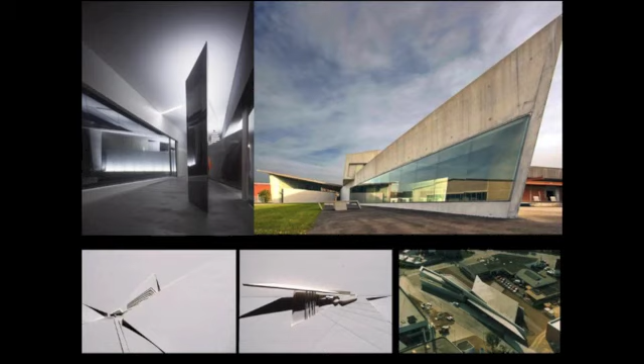25 years ago, we knew we wanted to do something very stylish. A year or two into doing all these drawings, a first client appeared, and I was working on this project, which took 3-4 years to complete. It was finished in the early 90s, and we developed these projects fully by hand with drawings and sketches, no computers involved. This year we celebrated 20 years since the completion of that project.

I'm still trying to look cool there. Then we created a series of projects, first in that harsh, geometric style, but unusual projects, like this housing project in Vienna.

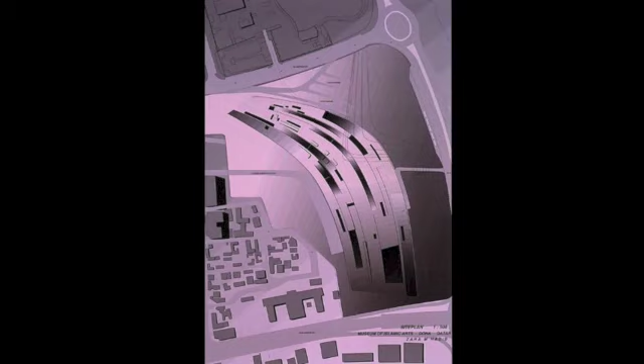In the mid-90s, after Vitra was finished, we got more into computers and into more fluid designs, curvilinearity, dynamism, and created a series of, I think, very beautiful competitions - maybe too radical for their time. This is the mid-90s, and all of these competitions were lost.

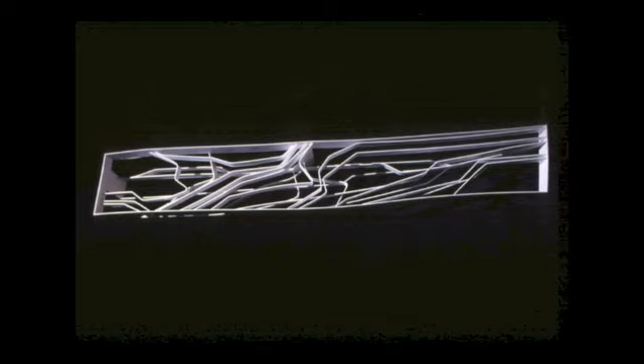So this is how you build success - you really have to spend 10 years losing competitions, I promise you, to develop a repertoire and keep going, losing and doing radical work. Maybe something comes out of it. Of course, there's no guarantee.

So these are all the lost competitions of the mid-90s. It became more fluid, more radical. And of course, we were still a very small, immature office.

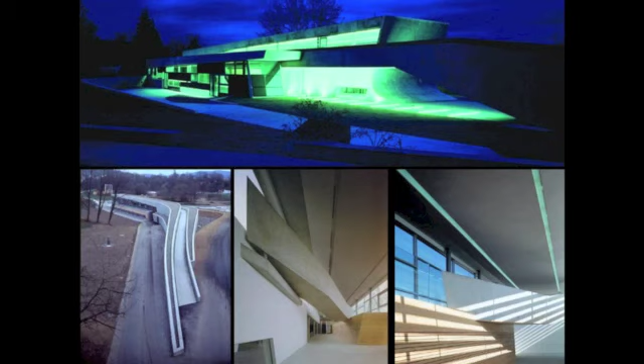Then we started to tone down a little and be more hard-nosed in trying to apply that approach. We had enough of losing - we wanted to win. So we got a series of projects in very short succession. By the end of the 90s, we won a lot of competitions, one after the other.

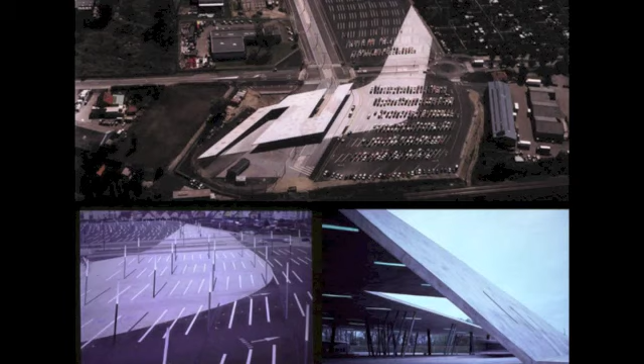All of these are competition wins: the Cincinnati Art Center, the ski jump, the Strasbourg Park and Ride scheme, which, by the way, won the Mies van der Rohe Prize. You can see here a very strong will to form, but it also takes care of the pragmatics of a car park, a train station, and a bus station.

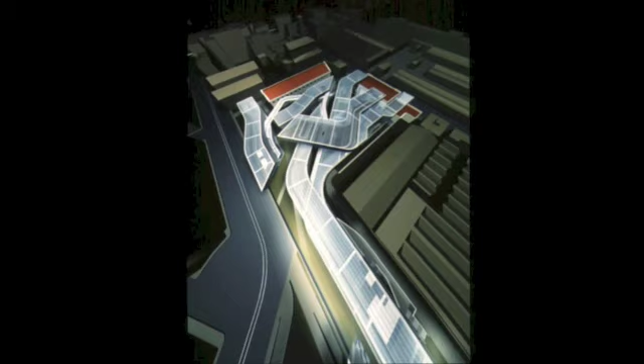And of course, we won our major competition at the time - this is in the late 90s, 10 years before the building was completed - MAXXI, the Rome Italian National Contemporary Art and Architecture Museum for the 21st century.

You can see here that we had already perfected 3D modeling using 3ds Max to develop these geometries and complex spaces. But at that time, we did not yet work with algorithms. Still, this project is fully within the paradigm of parametricism - this idea of adapting to context, of having a complex field which evolves.

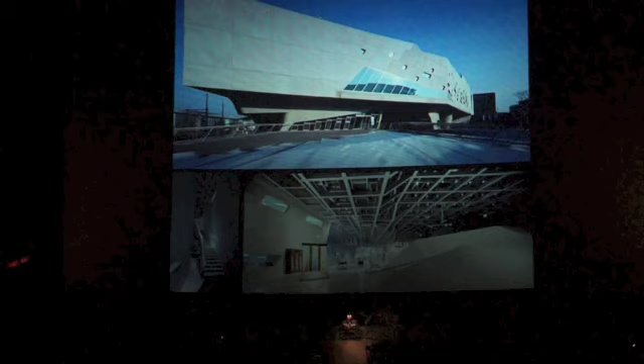A year later, we won the Wolfsburg Science Center. Now I'm clicking through a series of completed radical projects which established Zaha Hadid Architects. We moved from being a secret name known only in the student body and the realm of architecture, to a global brand through these projects, one by one, in the late 90s and early 2000s when they were completed.

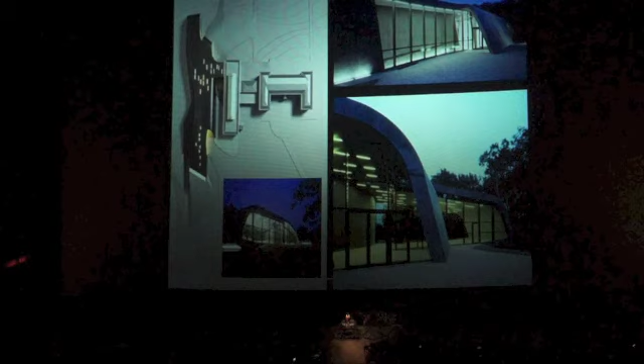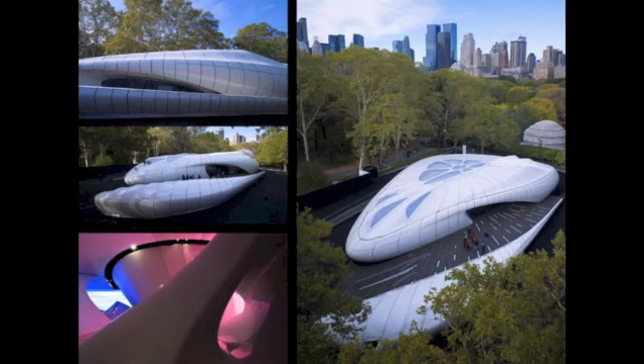In Germany, in Denmark, in Austria - you can see that although they become more fluid, they also become more refined and more elegant. Zaragoza in Spain, the Chanel Art Pavilion, which moved from Hong Kong to Tokyo to Central Park, New York, and Paris. And we made new friends in the process.

What's also important is that we always show exterior and interior, and the importance that the interior is very powerful, fluid, dynamic, and interacts with the exterior. So it's not only about exterior shape. And we also did pure interiors, like this one.

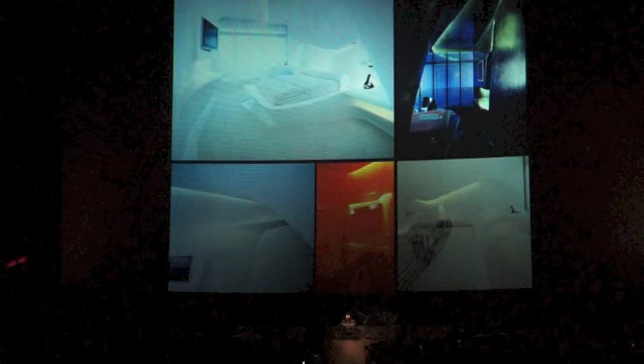Now the projects became larger, and again, all of these were acquired through competitions, like the Guangzhou Opera House, our first major project in China, which also took about 7 years to build. It becomes more radical, more fluid, more dynamic.

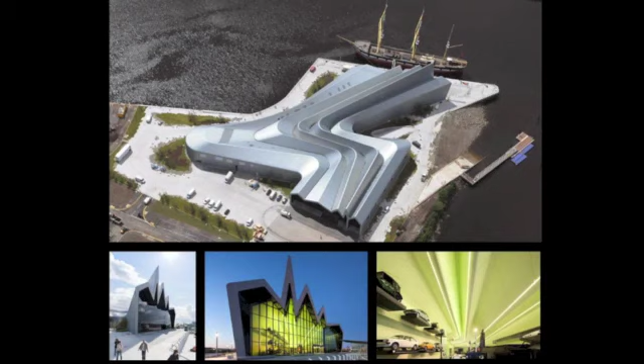We started to get into infrastructure and expand our repertoire. It's not only museums, opera houses, and cultural buildings - as you'll see later, we now have all the elements of the built environment within our reach: an interior recently completed in London, our first tower in Marseille, the Aquatic Center in London.

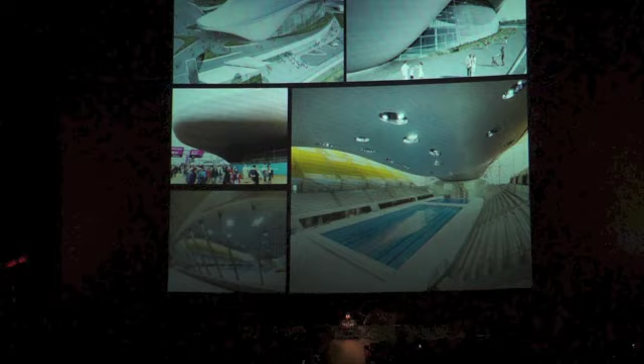And this one I'll spend more time on later - our currently biggest, perhaps most beautiful, and most evolved project, in Baku, Azerbaijan. It's a big cultural center including a museum, a national library, a conference hall, and a musical auditorium. So we got older, and we had new friends, and it's a different kind of audience we're trying to integrate with now.

But it took us 10 to 15 years to reach that, and now we have global clients and are operating globally. I recommend that you don't only work on big projects, but also do products, furniture, smaller things you can finish easily.

We've designed about 100 projects per year, but only very few get built. But these come out beautifully. They can be done on the side. They don't take 7 years, 5 years, maybe 3-4 months. We've always done that in the last few years, so there's a lot to show, to fill our spaces, and a lot to show off with.

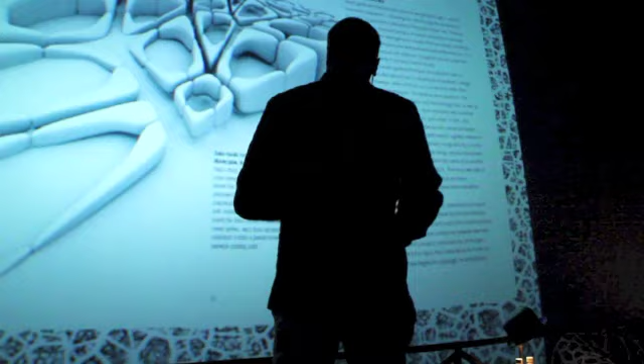I also want to say this: of course when it comes to executing the work now, I rely on you guys, on young architects, on skilled-up architects to help. My role now is instructing, talking, explaining, maybe doing little doodles. I used to do the modeling and scripting, but now I'm just doing that. And that's important—we moved from 4 to 400 people.

Okay, I wanted to walk you now through some of the theoretical principles which underlie this work, the built work you saw now, and then I will show you some new projects to illustrate that further.

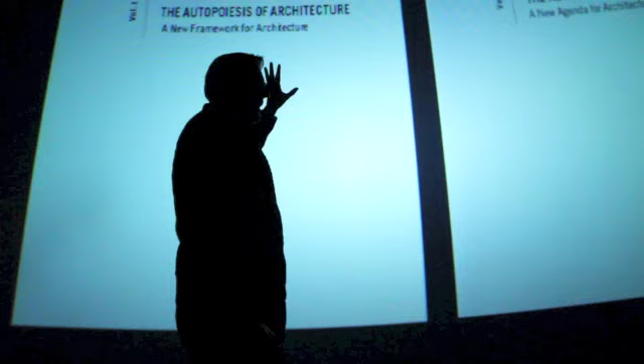I recommend this book. It's very big, but it took me 15 years to write, and I guess you will take about at least a year to read it. It's over 1,200 pages, maybe the longest theoretical book written on architecture so far.

Okay, what are we talking about? We're talking about parametricism, meaning that all the elements of architecture become parametrically variable. So we're not talking about rigid figures anymore, but everything is plastic, fluid, malleable, so that it can recognize and react to other forms. The forms are not hermetic and independent; they start to be set into relationship with each other and with the context. That's the meaning and power and beauty of making the elements and figures parametrically variable.

So we're moving from a world of these Platonic solids—the cube, the cylinder, the pyramid—which used to compose everything in classical architecture, but as well in modernism. It's always these discrete objects which are just added to each other. They never influence each other, and that's why they never notice each other and are sensitive to each other. So they just agglomerate, and if they agglomerate like today, with a lot of diversity, they generate a kind of urban garbage spill. There's a lack of identity—these things are piling in, they don't congregate into a legible local order.

Here we're talking about the objects being sensitive, interacting with dynamic fields with each other, with attractors, with force fields, and they generate very strong and powerful integral organic orders. And this work I'm showing here is already exactly 20 years old.

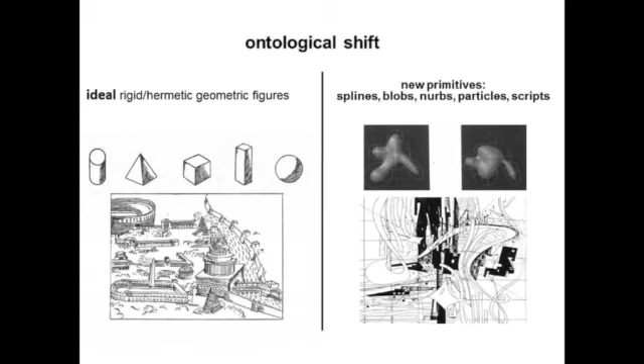When we were at Columbia University in '93, we started this process, the next stage, and also Greg Lynn with the blobs started that year at Columbia, maybe one year later. So it's very important that this took a while.

I'm showing these again from the animation to emphasize the difference. When you had these rigid figures, the cubes and cylinders, you drew them with a ruler and a circle, and they remained stiff and inert lines. The way we work with lines is we set them into motion, into arrays, into force fields, and let them configure and self-organize into complex variegated orders.

It becomes very hard to invent and imagine without these kinds of tools.

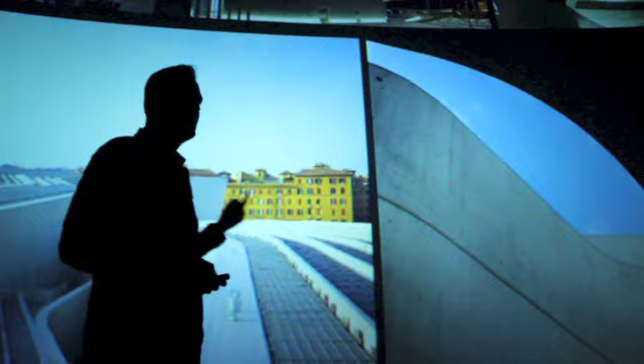To some extent you can interpret Rome as an early version of these kinds of lines—bundles of lines which flow and bifurcate and intersect and create an exterior complexity and an interior complexity. You also see that the whole building is brought under this radical formalism of these flow lines, and every pragmatic element is taken up and brought into this artistic process. That gives you a chance to create a very legible and navigable order.

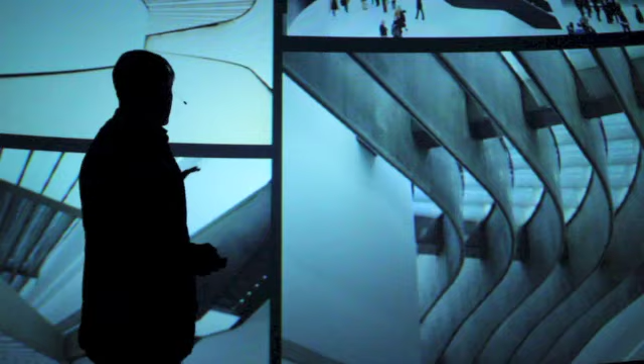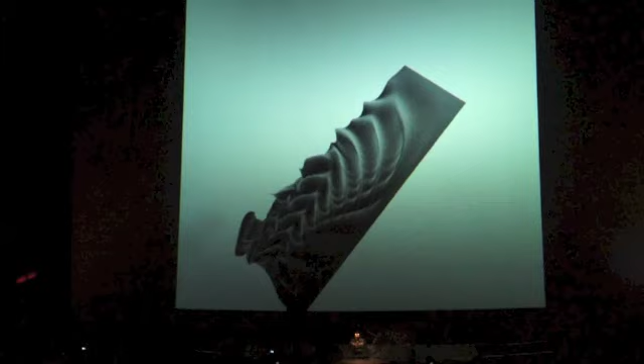So this is with lines. We have lines, planes, volumes. In terms of planes, when we work with surfaces now, we're not talking about flat and uninflected plates like floors and stiff mute walls, but surfaces which are radiating, which are rippling, reacting to impositions and becoming interactive with the environment, differentiating within themselves.

And this is the kind of environment we create with these kinds of surfaces, where the surface ripples to create a shelf, to create a bench, which then peels itself free.

So it's a continuous variation of forms and situations rather than just the assembly of preconceived discrete elements. This is a very powerful way of working.

In terms of volumes, we have these kinds of volumes which bleed into each other, which congregate and create larger unities in a dynamic field.

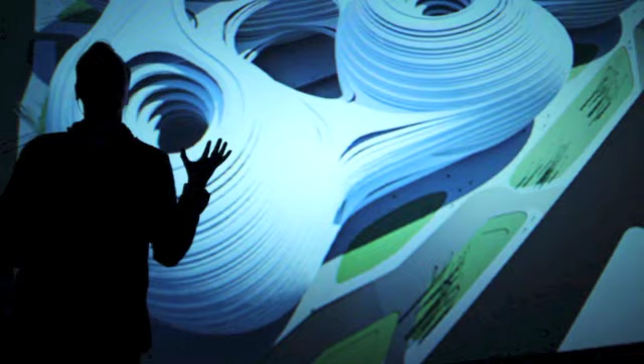And these are the kinds of projects which are coming out of that, which is all about making connections and creating a continuously differentiated and varying space, where with each move the scenery changes, but it changes in a lawful way, in a way you can orient and navigate it.

This, I think, is very powerful when we're talking about whole swarms of elements, whole groups. They're not kind of repeated, but they're differentiated.

So this means that the urban texture can affiliate to an existing context and bring that context into a larger order, at the same time generate very strong differences internally. Modernism would only be able to put something repetitive in the middle, so you'd have three different zones, and now we have one coherent differentiated whole.

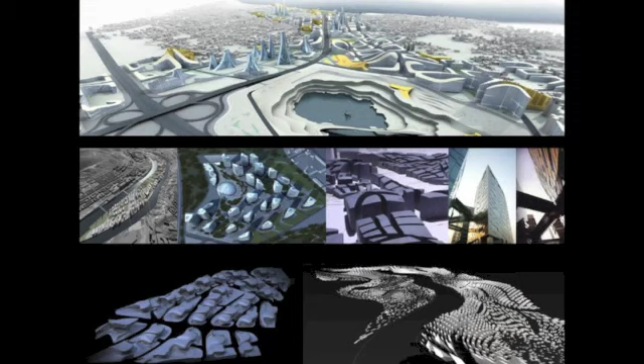And this is what then comes out of that, when we look further and apply these methods to master plans in Istanbul, in Singapore, in Bilbao, in Libya, in Spain, and London. And you can see when we look at the work in different schools by different students, it is in one spirit, and they all share the sensibility.

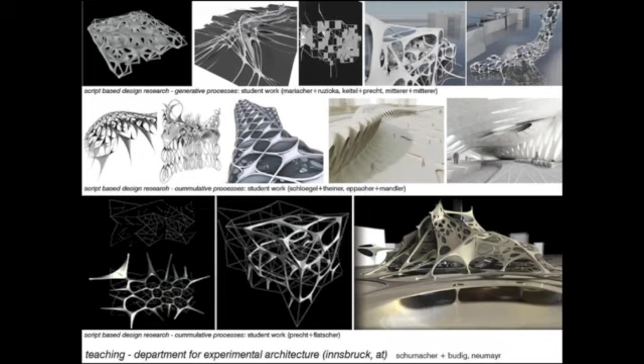They all look like organic structures, quite differentiated, fluid. But if you look close, they're very different from each other. So the internal diversity is much richer than the diversity you find in modernism or in classical architecture, although they all share a set of new physiognomy.

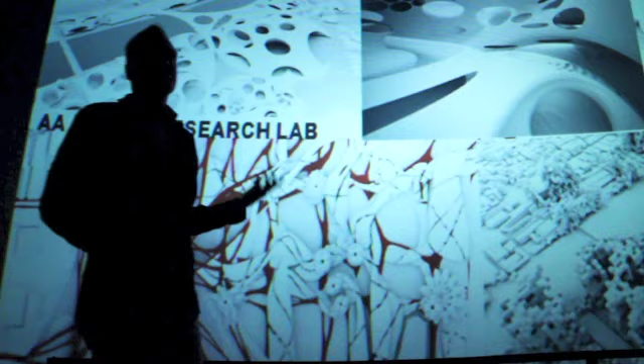So you have that dialectic of a unity of approach with a radical uniqueness in each of its instantiations.

This is the students at the AA. So there's various teaching arenas: we do the research at the university level to develop radical ideas, try them out across different studios, and then start to apply them at a later stage, or in parallel, sometimes with the students coming into the office in professional projects, to demonstrate also to clients, politicians, and mayors that what looks so strange has actually a deeper rationality and brings advantages to the cities which employ that.

So now I'm going to go through some of the principles which underlie this work, and initially they are just formal principles. What are we talking about?

Negative principles, meaning these aren't only ways of working at the moment, but we also have to reject old ways of working. We have to say we are not falling back into the old ways. So there's also a series of impositions: don't do this. So we're no longer doing rigid forms.

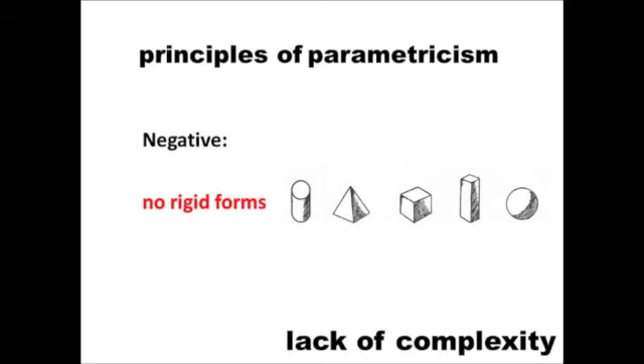These kinds of elements are excluded from our repertoire because they lack complexity and they lack interaction capacity. So we get rid of that. That's very important, and it's not only that I say you have to get rid of it — it's an observation that for over 10 years we have no longer used these elements. This whole new generation of architects, the whole office, all the students we're working with, have never used these. So it's also just a description.

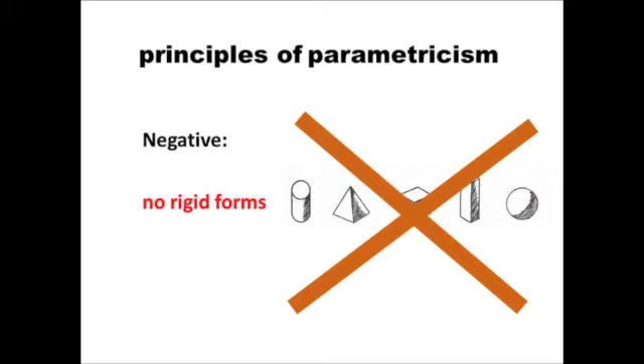We no longer do that, but I also say that's good. The next principle concerns simple repetition, which is also the default condition in modernism but also in classical architecture — usually you have the bays repeated, even in the Gothic. So we're saying there's a lack of variety; this doesn't represent contemporary society anymore. So we're also saying that is no longer possible.

No simple repetition. And there's another negative principle — I call it the principle of pure difference, which means you just let different elements come together, unrelated, and stay unrelated. That's what I call the garbage spill development. That's actually since the crisis of modernism, since the death of modernism — that's what happened globally.

There's not much master planning, not much coherent planning — it's just let everybody place whatever they would like, and that creates a kind of visual chaos, a cacophony of elements which is disorienting, and in the end, that's a tragedy, it looks everywhere the same. If you pick up garbage cans from every household, each one has very different things in them, but they all in the end become one spill, one undifferentiated, unrecognizable mass. So this makes it impossible to generate identity, I would argue.

There's simply a lack of order, lack of identity, and that's why we also need to reject that. The problem is we're rejecting everything classical architecture was doing in terms of rigid forms, repetition, symmetry. We reject everything modernism is doing, and we also reject everything that's happened since then in the real world. So we need to start all over again.

And the question is, what are we doing? You know what it looks like. What are the principles by which we are working? What is our source of inspiration, since all prior architecture is in a sense bankrupt and we have to start from scratch again.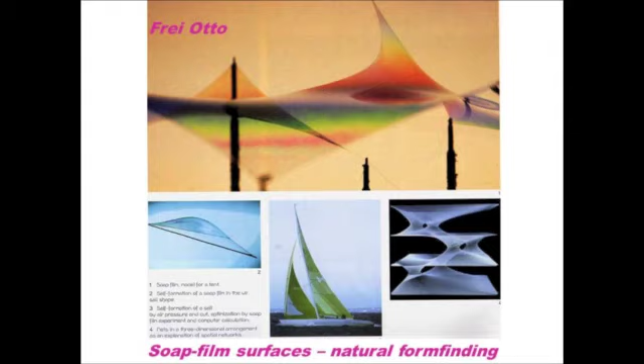And there's one precursor who has been doing some of that through going to nature and using physical processes to generate form. That's the great German engineer-architect Frei Otto, who started this work even in the 60s, 70s, 80s. In the end, he even got some computational support, but he was limited, of course, in his fabulous work to what he could study with physical models.

And we're going beyond that now, creating a second nature which is no longer limited by the physical models and by real physical processes, but we can simulate artificial processes and generate parameters outside of the natural ranges.

I'm just showing you now a few images, and I'm going to go quickly, of the way we work at the AADRL in terms of starting with physical models and physical form finding, and then moving from there into digital processes in which we explore the world further.

But you can see the richness of forms. This is like the endless forms of nature, produced by students exploring materials—exploring the elasticity of materials, exploring gravity, viscosity, tension, material texture—and generating materials by knitting geometries into material textures, with the idea of continuous differentiation.

This is a great laboratory for developing these forms and processes and inventing this kind of second nature. We're usually working from the physical into the digital and then back into the physical, and there's no end to what you could choose and work with. Of course, then there are issues of scaling, but it's all about finding principles of material computation, which could then be translated into digital computation and simulation.

So this is the world of quasi-nature. This is the kind of architecture which comes out of the office. And again, I'll show you these digital results.

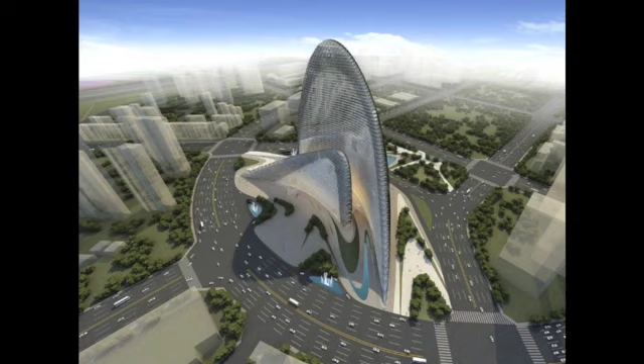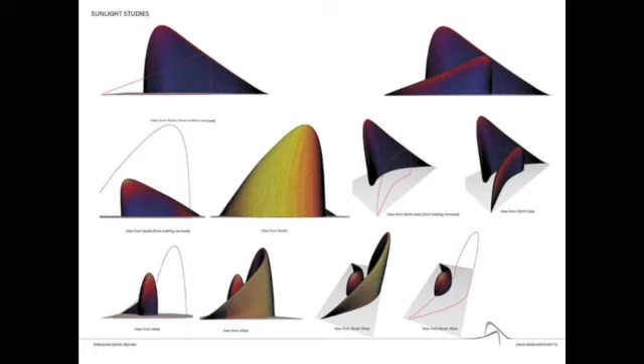And this is another example, a large tower we're just completing in Beijing, where we can integrate engineering information and data. So these are sun exposure maps which are applied to the volume. That information can then be transcoded through—that's your creative act of the designer—to invent some kind of transformation algorithm and a geometry which can receive that difference.

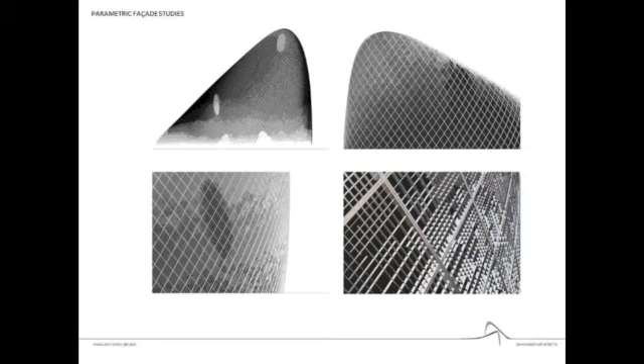And then you write an automatic translation from the sun exposure map into a differentiated geometry, which you can invent various ways of doing, of course. But this one is again an intelligent differentiation of a system or subsystem with an intelligent performative input.

And I think it's important here also to distinguish parametricism as a style which comes with a particular desire for differentiation from the mere application of the tool, which, for instance, somebody like Norman Foster, a kind of modernist still, I would argue, is using. He has to use a parametric system here because each joint is actually its own unique angle, and he invented a kind of generative component we can adapt to different geometric conditions.

But his intention is to use parametrics to deliver a kind of neutralization of the differences. He wants this to be looking as even as possible, even though it is locally very, very different. Our spirit is very different—that's why it's not only technique, but a kind of artistic desire, a style, a set of values.

We like the conspicuous amplification of difference. We like this kind of space. And I think this space, where you have differences, represents much better the way contemporary society operates. We are not just one big mass in one space, but differentiated in different lifestyles, different groups, different ages, different professions, different patterns of interaction, and they can find themselves in such a differentiated space, where the differences become very clear—singularly ribbed, grid ribbed, more densely coded.

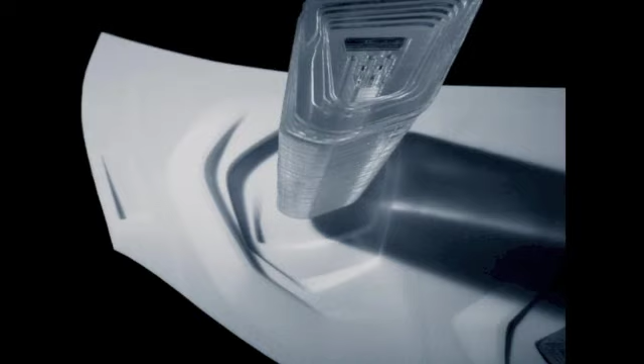Or here, where the tower interacts with the ground condition, it's not just sitting there flat without anything happening. When the tower enters the ground, it creates a crater. Every action has a reaction.

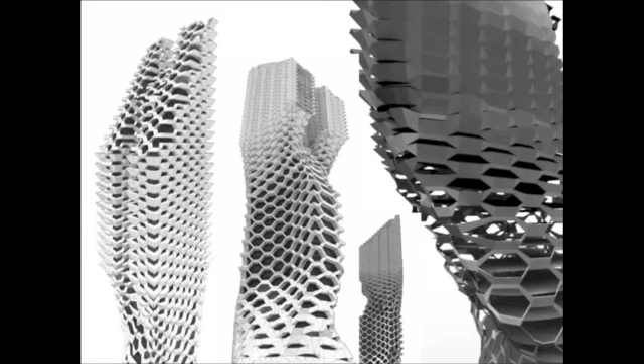And here again, there's differentiation in the tower section. So there's a square section becoming a T section, becoming an H section. And when we apply the facade, there's a correlation, a transfiguration or transformation, again from the facade, from something closed to more of an office curtain wall, to more of a kind of balcony system, all based on the hexagonal. So there's a kind of two subsystems, differentiated and correlated in a coherent way.

And I think you can also enact that with associative logics, in parametric models like this, where a lot of these geometries are pre-linked together and react to each other, follow each other, and work together.

So it's important that we always have multiple subsystems which come together. And here's another example from a student project. Some of these projects are quite old; these principles have been the same for 10, 15 years. So I can pick examples from 10 years ago or from last year. Maybe the last year ones are more refined.

But you can see here the skeleton initially, one thing is certain: it should be differentiated from the ground moving up, because forces and structural forces are much heavier on the ground, the loads, the moments, and there must be differentiation up the axis.

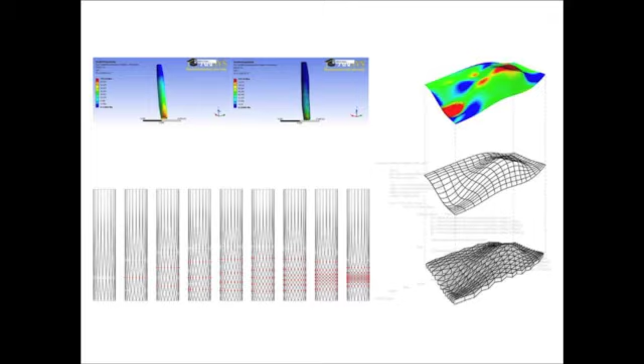Now if the tower starts to react to another tower and is bending, complicated, at the top you can see we're using finite element analysis, stress analysis, and then what we're doing?

We then use this information to make a more subtle differentiation of the skeleton. So we're generating an algorithm which translates the stress diagram of the volume envelope into a point diagram and then a structural network diagram. So that develops a skeleton.

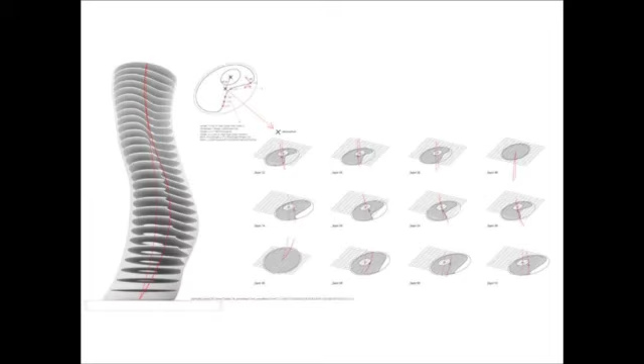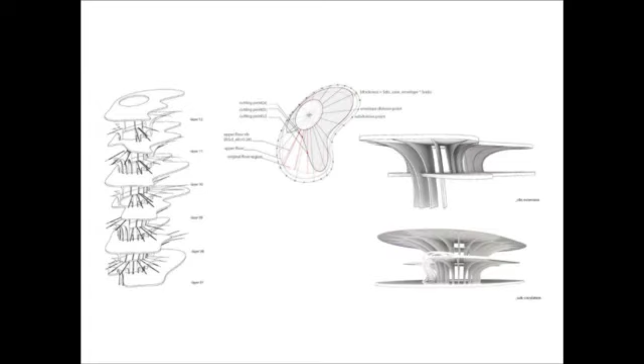Then we develop the idea of openings, the idea of the floor plates reacting and pulling away from the openings, the idea of ribs which react, configuration of the recesses, and the interaction of the core with the outer envelope. And this will be building up these subsystems, and you can see what happens.

There emerges a kind of natural beauty because there's differentiation and correlation, like in nature, where, for instance, the vegetation grows onto a topography and does it in a coherent way, in a differentiated way. Later we can perceive that as elegant and beautiful and well ordered, and we can also navigate this because we can read, for instance, the topography through the vegetation. We can find the river in the forest because it follows the topography, etc. So there's a kind of well-orderedness which makes the built environment more beautiful and more legible, more navigable.

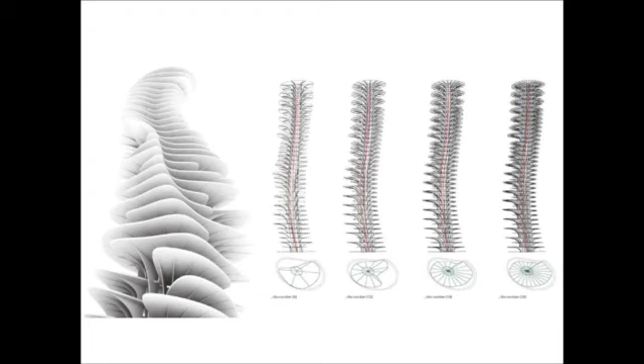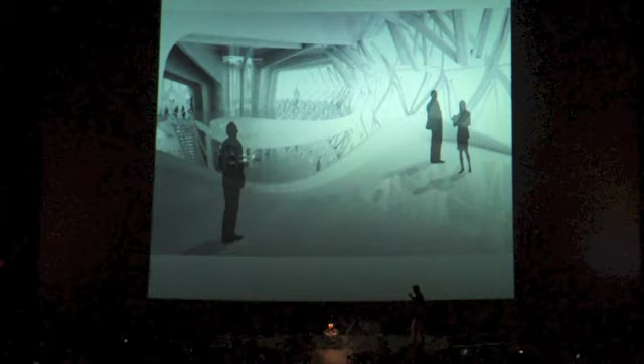And here the next layer comes in, the facade, which recognizes, again, voids pulling away. And so you get an orchestration of the different subsystems. I think we recognize this as a very powerful beauty, that complex organization.

So this, in summary: we have three negative principles—no rigid forms, no simple repetition, and no collage of isolated, unrelated elements. And three positive demands and principles, which in a sense are the inverse: all forms are soft, all systems differentiate, and all systems are correlated.

And what is very important is that this brings that intensification of relation. But also, I think what I wanted to say here is you can use these principles to critique your project and have a good heuristic to always improve your project, enhance your project, enhance its intensity and beauty.

So usually there might still be elements in your project which are too rigid—they're not really inflected, not informed. You have still forms of simple repetition in your project. So you can think: how can I differentiate further? How can I give my elements more degrees of freedom? And in particular, what you can always improve is that you can always correlate more. You can always let everything communicate with everything else.

It's an infinite project. So if you've allowed your skeleton to correlate to the envelope and to the interior, maybe you haven't yet correlated with some exterior context. Maybe there's a further element of context, maybe something in the underground, maybe there's a road coming in which your project should react to. So it is always—you can always do more.

With these principles, you can always enhance the intensity and beauty of your project. Of course, it's difficult - the more elements you already have interacting, the more any new element needs to pick up all these relations without destroying them. But what's good about this, I call it a heuristic - these are principles for how to improve your project. The more you work, the more powerful and beautiful your project will be. And this applies to urbanism as well.

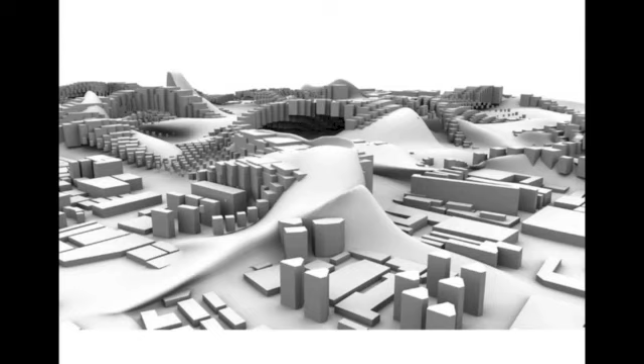This one is more interesting. It uses three fluids which interact and generate beautiful dynamic patterns. Then there's this transcoding - you take that information from the fluids and transcode it into voxels, all fluids in one way, or one fluid as a voxel, the other as a continuous surface. There's a lot of freedom. The same fluids generate different architectures, multi-systems. You can rerun the fluid or switch transcoding, and in the end all these different morphologies - three or four of them - each follow one of the data sets of the fluid, generating that complex variegated order we recognize.

Or another one where you have swarms of elements, and there's a correlation of the elements with the networking script. In the end, we generate something like this - very rich, intricate, generating a unique identity, never boring, always different, but also ordered and navigable. It's not that visual chaos, that urban garbage spill we talked about earlier.

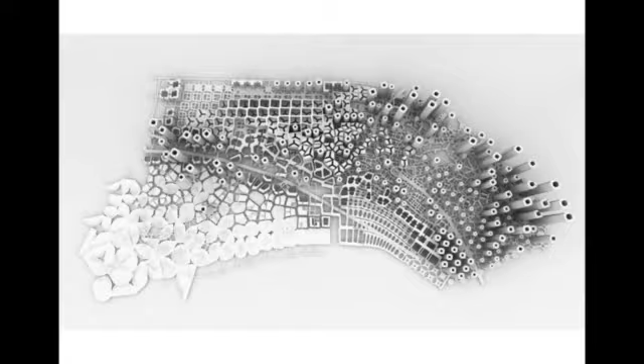This is one of our projects, the Istanbul Master Plan, and you can see we're creating something radically new that also embeds into an existing context. For the street system, we went back to some of Frei Otto's experiments with bundling and clustering lines through viscosity of water. We did this with the Maya Hair dynamic engine, and we wanted to pick up all the little streets from the context, but the new territories couldn't be that fine-grained.

So we started to bundle these streets according to a logic, and then did major line cutting north-south. We generated and abstracted this into a series, into a soft grid with some of these bundlings, and then filled in a new kind of fabric. We worked with two types, a block type and a tower type, the cross tower type, and then allowed these two types to become similar to each other.

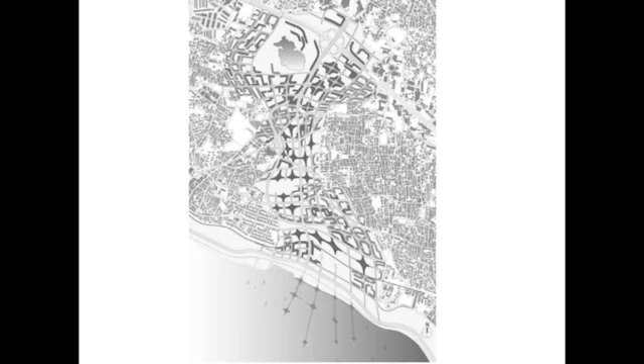So we're starting with difference and then assimilating them to each other - the cross tower and the block create a kind of quasi-tower. This way we generate a kind of lively texture. You can also see there's a correlation between the overall shape of the new territory - where it becomes narrow in the middle, it pushes the towers up. So the elevational profile gives information about how the plan expands.

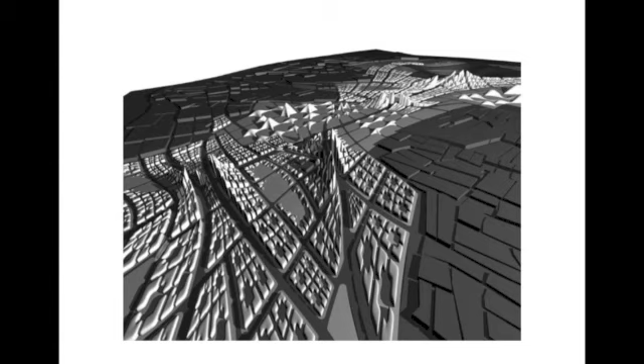This is very important, that these kinds of transformations give information, making the project legible and navigable, so that you can draw inferences from what you see to what you don't yet see. And that makes for good orientation.

You can also see here that when we zoom into the block in detail, the facade relief on the outside street is very deep, while in the inside courtyard it's very shallow, transitioning from public space to more private space. You can follow a kind of facade relief - a semiology which explains where you are in the system and which way you're moving, into the interior of a private domain.

So those were the principles, some of its important illustrations. Now I want to click through how this applies to design, for instance.

We just opened the design gallery in our London office, giving ourselves a public face, a two-story public showroom - let me show you what we have on show. We're creating these complex environments, three-dimensionally complex furniture pieces, sofas. They're always freestanding, interactive, creating fields. Sometimes they're quite abstract still, because these are experimental furnitures - they hover somewhere between sculpture and furniture, because when you're trying to develop new forms and new functions together, you might sometimes have to phase it.

You work on the new form first and then think of a new function later. You're also exploring ways of making forms, like this freestanding desk and tables. Just click through some of these images from our gallery.

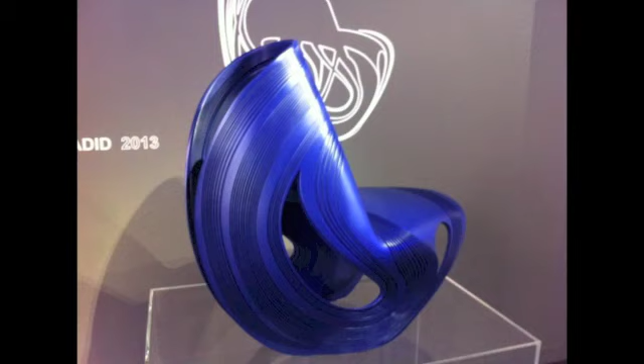For instance, this year at the Milan Salone del Mobile, the big international furniture fair, we launched 12 new projects. We like to be present at these events, so we created our own space, filling it with this new set of sofas, and launched a new auditorium seat.

Sometimes we like a whole range of furniture pieces to come together to create a space, rather than acting one by one. There's a lounging area, a shelving area, a freestanding piece, coming together to generate a total environment - a collection of elements that belongs together: a swarm of stools, an armchair, a cabinet, a chaise longue, shelving elements. They create a kind of collection of elements which works together. We call it the seamless collection in this case.

The cabinet is interesting - it's again freestanding. We don't like things often only pushed against the wall. The drawer pulls out and then sucks in from the other side.

Sometimes we also create objects that don't have a very fixed and unique purpose. You don't know what it is, but maybe it's a seat, a table, a storage unit. It's a kind of enigmatic object thrown into, for instance, a gallery for social use, social clubs we're generating, and they're kind of interactive. As soon as you pull away the stereotypical things - oh yes, this is a table, this is a chair and I'm sitting at the table, this is a sofa - you can generate more interaction, more interesting social situations. So I think it becomes innovative.

We're creating this big bar piece, but also more product-like lamps and chandeliers. We're getting into car design, kitchens, outdoor furniture, and migrating into nearly sculpture - or is it benches? We don't know. It's just filling the world with this kind of new organic material and inviting users to interact with it.

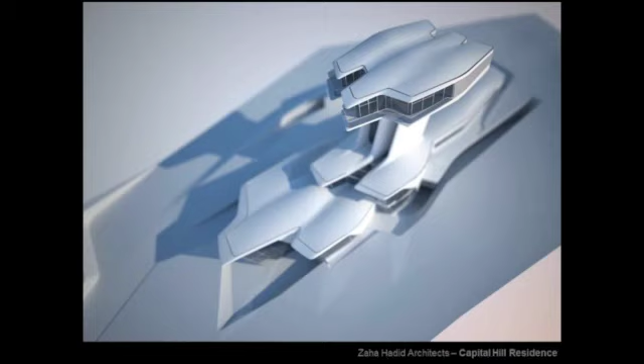Now, some of the projects which I started showing are projects which have been completed, which you might have seen published. This is what is currently under construction and in completion.

It's a kind of amazing villa in Moscow, which has a series of low spaces carved into the ground, and then pulling up the bedrooms to be above the tree lines. It's in Moscow, just finishing, all clad in fiber concrete, and we're currently working on the interiors.

So it's very adaptive to the conditions. It works with the topography of the ground, and it works with the datum of the tree lines - a tree house up there, you'll see later - and always connections, visual connections between the interior and exterior. Up there it's quite beautiful, I'll show you.

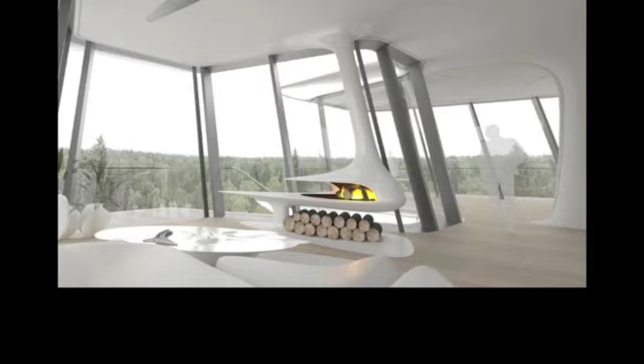So this is some of the way we work on the interior, very fluid. This is now working and developing the bedrooms up there with a fantastic view across the forest. Every single element is uniquely designed - we created this bed, we're creating the cabinets, we're creating the bathroom. Everything is tailor-made and fitted together into that new kind of piece of art.

Another project we just finished, I'll click through quickly. What's interesting here is the flow lines, all applied in sections. This project works through section only, and you can see before you enter the building where you're going to flow through in section. Certain things push out, major prominent things, like the auditorium pushes out. Underneath is the entrance, there's a sky garden you can find, and it's beautifully detailed, all in concrete.

And we love robust and fluid material like concrete, where you can step in and flow sectionally through the building, interacting exterior and interior. There's a library and public administration building in France.

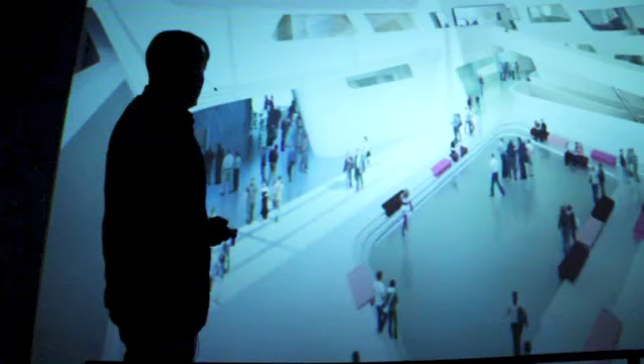Another building on site is a library for the Economics University in Vienna. It works similarly, very sectionally, with two interacting institutions, the library and the student center. I love these kinds of spaces where you can see many things simultaneously, looking across levels.

That characterizes most of our projects. We have these atrium structures, but not just one atrium—one leads to another, to a canyon, then to another space where you look back, down, deep, up, across. That communicative sensibility is very important.

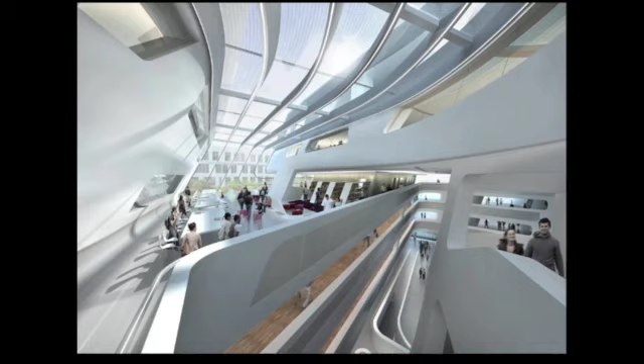It's what we need in today's network society, where we stay in touch, enter a building like this, and see what everybody else is doing rather than hiding in a little cell. So this has been realized—these are photos on site showing how these things interact, intercut, and create wonderful fluid communication spaces.

I think libraries are very important kinds of buildings in the knowledge society, where we need to stay in touch, need to be connected. Of course we stay connected through the mobile phone, the laptop, but the great thing about the mobile phone is we can now take all our computing network with us. We don't have to hide at home; we can roam around in a public space, in the urbanism.

That makes this urbanism much more connective. We're not locked into a room—we can roam and browse the urban environment to find new partners of interaction, encounters, and network continuously with people out there.

I call these surfaces interfaces of communication, which are much more rich and dense and versatile than that little screen. I keep one piece of information on the screen, but I get potentially hundreds of pieces of information rolled out in the urban environment. All of these are interfaces of communication.

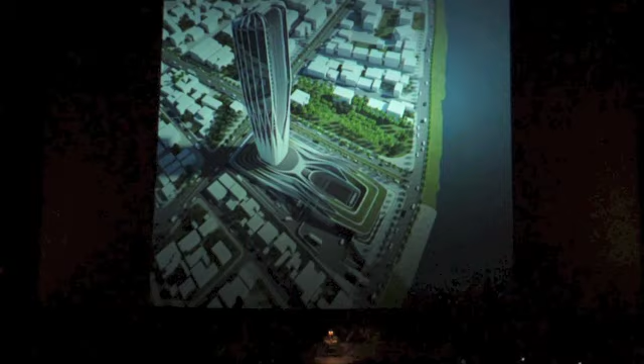Even in our towers, where we adapt them to local climates, we have a kind of big atrium we're navigating through. We avoid this kind of isolation into individual plates and spaces. We like this navigation from the ground into the tower, being able to follow that.

So when you move through here, you're already drawn toward the tower, you can see it, and you connect up to it. This is all about navigation, orientation, and seeing what comes next—so you don't waste time running down blind corridors. That's very important, so we're developing towers and clusters of towers with atria that reveal what's happening inside.

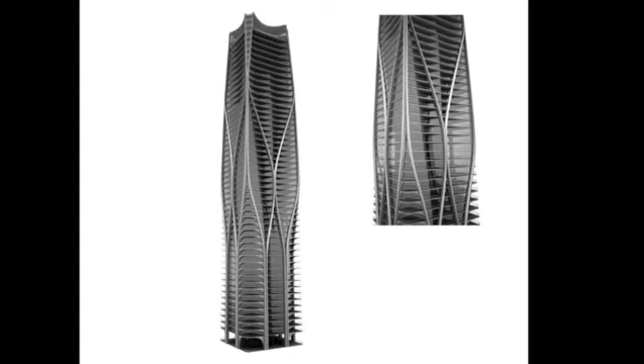New tower in Miami. Again, we like to use the structure and skeleton to give identity to the project, to differentiate it. There's more structure at the ground that bifurcates and becomes lighter toward the top.

We also align it with three apartments in the lower areas, two apartments in the middle section, and one apartment per floor in the top section. So there's a structural logic, and a functional logic follows and adheres to it, and we vary the balcony condition accordingly. It's beautifully differentiated, a very rational product—nothing irrational about it. It presents a very clear logic and structural performance.

This is a kind of mature work—we've matured with our principles and ways of working, so we can now take on commercial clients, big projects, mixed-use projects, residential towers, office towers.

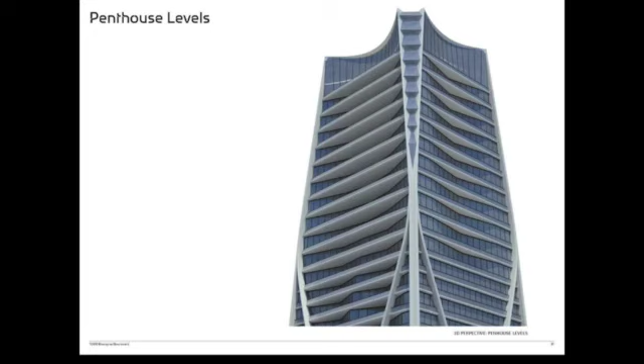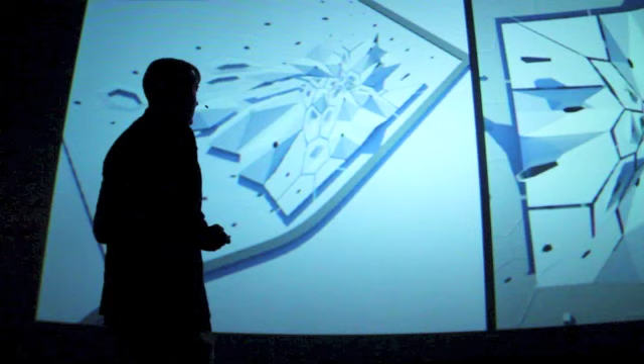And applied to a larger research campus—this is the Environmental Energy Research Campus in Riyadh, based on hexagonal arrays. Hexagons are interesting; they have more neighbors than squares or cubic elements.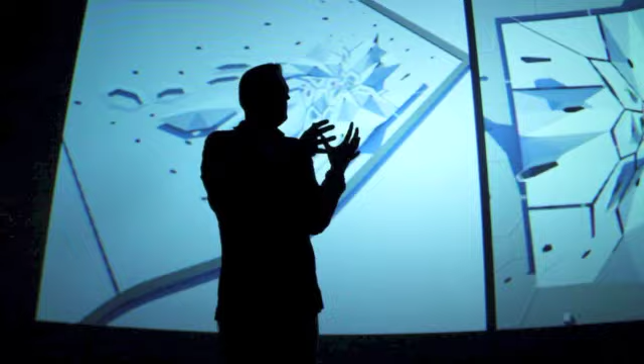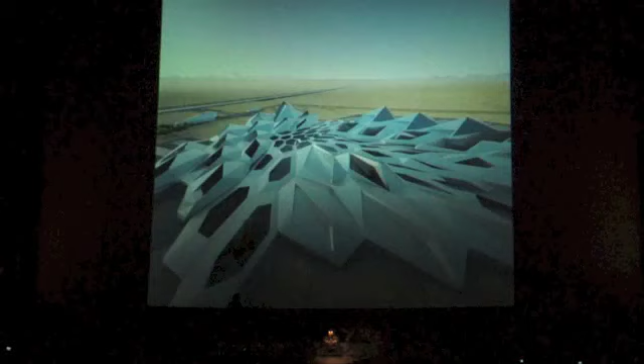And we still managed to differentiate them in size. These are early computational studies of the field. This is a later developed project, and we're working here with a very strong environmental agenda.

So we're having very hermetically closed volumes with courtyards oriented north and staggering in height to scoop the wind in. It's very much a morphology developed from environmental logics, as well as programmatic logics. Very deep and small windows, and then this indirect light through the courtyards.

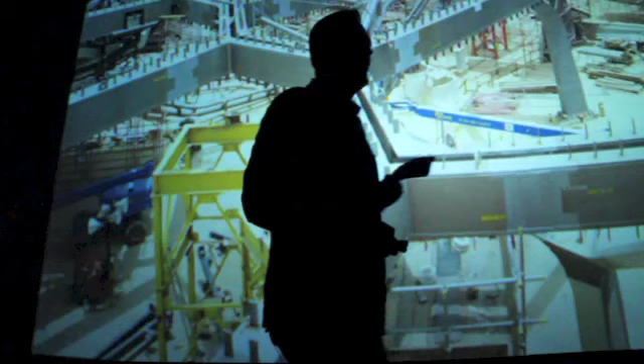That hexagonal shape, which is in plan, operates also elevationally, so there's a legibility from the elevation with respect to the plan. And we have these covered areas where we use again the hexagon, but this time we use the fabric tensile structure to shape it. There's a lot of steel there, and a lot of geometric complexity.

Now you could kill yourself trying to draw this, right? Thank God we have parametric systems. And if there's a change, you can let the machine recalculate all of that. But it's still a lot of work. We have a big team on this one to control it. But as the construction industry invests in these parametric systems for fabrication, these become manageable projects. Every single thing is different.

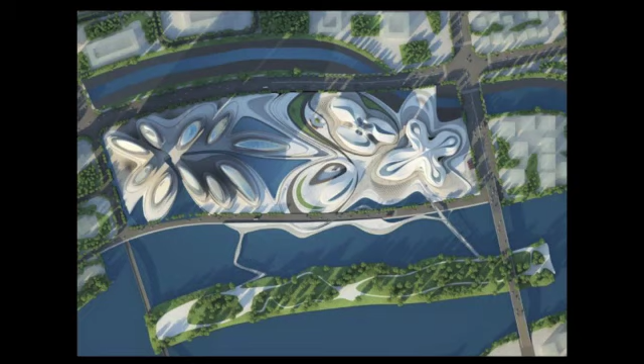And more opera houses and conference centers. Now, what I showed earlier was the movie of the Changsha project. This is in Changsha in China. It's a complex—you can see here we like larger complexes of buildings, not just singular buildings like the Riyadh campus. Here we have a cultural site, an opera house, a museum, a multi-purpose hall, and a kind of programmatic landscape with some retail and recreation areas. And then there's a commercial center with offices and retail, all together creating a kind of ensemble.

And again, it's a super ambitious project—maybe the biggest of the cultural projects currently under work. We're working on it with our Guangzhou office at the moment. We started in London, and it's an amazing effort. You saw the movie earlier—it's the opera house, it's the museum. But the importance here is to have coherency and continuity across the buildings.

You saw this animation earlier, and I want to show also the Galaxy project, which we've recently completed in China. Here I want to demonstrate what I was talking about earlier. Each of these volumes is different, they connect differently, there's a relationship to context. There were ideas like this terracing to find a buildable way to translate that fluidity. There's a metaphor of the galaxy, but what's more important is actually the creation we end up with, rather than analogies to be drawn.

I was criticizing earlier that in Asia, people like analogies to justify their projects, and even when we come to Asia, we feel compelled to do that. But this is also a fascinating contrast, by the way.

What I'm trying to get at here in the project, which is fascinating, is these kind of vistas, this space of communication that you see deep into the space on different levels—above, below, all around. That is very immersive, and there's always many things to look at. With each step, something new comes into view, something new to strategize, and this is a very interactive community, because this is for very small upstart companies, for startups—literally thousands of companies, because there are very small units. Everything below that bridge level is retail, and above is office.

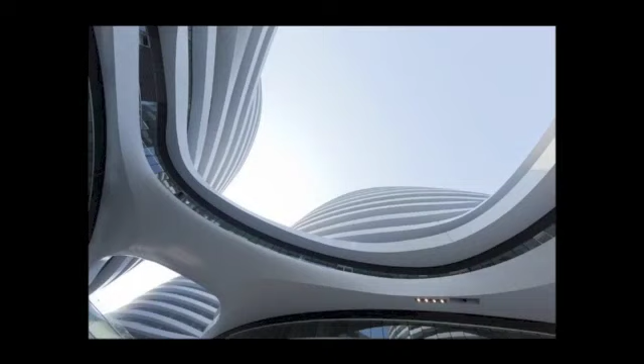And we love this kind of world of moving through. It keeps changing, but this has a certain logic—you know what it means for the bridges to connect the retail areas. There's a lot coming into view. That is the surface, the interface of communication I was talking about earlier, instantiated—that simultaneity of interaction and activity on the exterior. But also when you move closer, when you move into the project, this continues. There's always views across levels, across bridges. There's soft corners, glass corners, and an enormous communicative potential. And there are 4 of these major atriums.

I think it's very successful, and we're very happy also to start addressing not only these kind of rare cultural iconic projects, but everyday work scenarios and work environments that we're getting into ourselves.

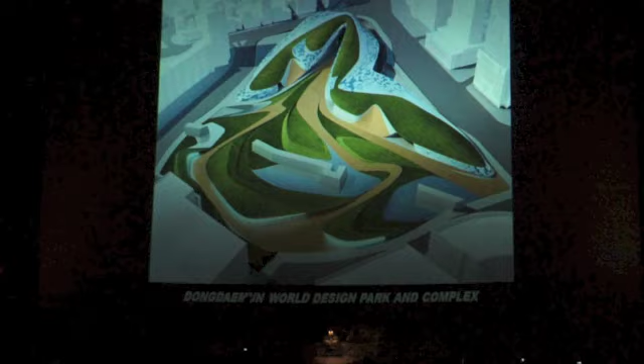This project is happening, and it will open in early March. It's the Dongdaemun Design Center, so it's a design museum, a design exhibition center. What's interesting here is the integration with the parkscape, which we created as well, where the park goes down to -1 and moves up onto the roof, moving through the building.

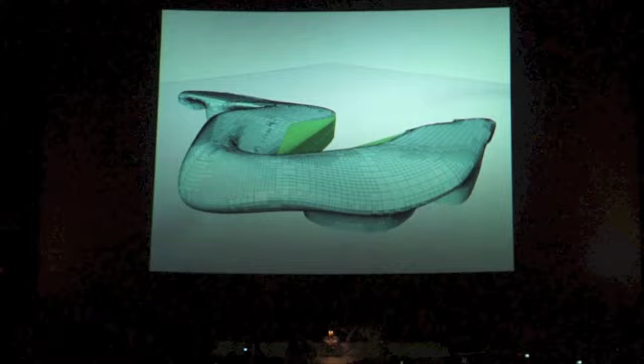The building is very fluid. It sits in a complex context and adapts to that. It creates a kind of powerful image in the city. It draws you in with that cantilever. There's actually a negative -1 space under the cantilever.

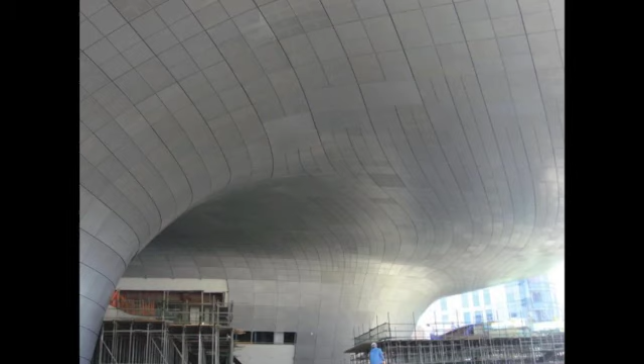You can see that it is beautifully constructed. This is with reprogrammable molds, pin machines. So we now have manufacturing techniques which can make double curved panels, each different, without needing unique molds, but having a reprogrammable mold. What's beautiful is that instead of windows, we have perforations, with windows behind the perforations. So there's a unification of the envelope, but a lot of light coming in once you're on the inside. I think it works very well.

The final project I want to show is the Baku project. I think it demonstrates that we're increasing our virtuosity, operating on a larger scale with more radical fluidity. We also had the good luck to integrate the whole parkscape. There are three components: you can see the museum in the front, the peak in the back is the library, and the conference center is to the right. It bleeds into a plaza.

There's a continuity of surface between exterior ground surface, wall surface, and roof surface, with different exterior spaces connecting—a network of exterior spaces accumulating into a grand interior. Here's the main entrance in that cut, but you can see on the right the secondary spill-out areas for the conference center. There's the backside, another spill-out for the cafeteria. So it looks very different from each side but is recognizable—it opens up in different ways to different sides.

At night, the main entrance—you can see where the surface bleeds into the ground. Sometimes it's very solid and hermetic, sometimes very open. The backside goes up to 80 meters. We like that—sometimes it really swoops upwards. Some of these cuts orient views for the library.

The structure is a continuous space frame in shell action, so there are no columns anywhere. Wherever the span becomes too large, we dip down and lift up again, which also motivates a courtyard in the center. The entrance situation you see up in that wormhole—that's the kind of vista we love—all the way to the top floor of the museum, with these connections.

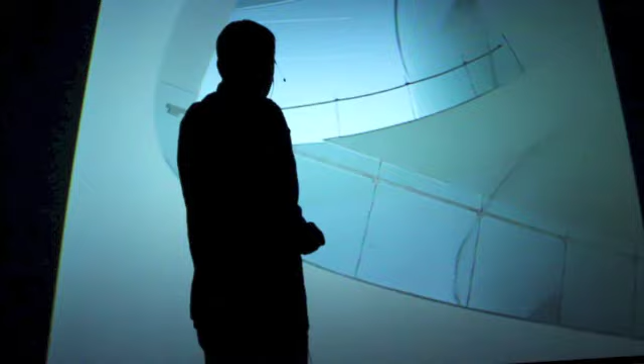The drift, the swoop of the light like swarms up the ceiling, and this is the view into the library, again into that tip. Everywhere you go, you have views above, below, inside, outside. There's an interaction and networking of all the spaces—everything communicates with everything else, which we love.

Big ramps—you see the way the staircases bleed into the wall and become the lighting, so things translate into each other, making for an interesting unity of space. Rather than adding different things together into a collage which falls apart, we're using formal systems which modulate and transform themselves into different functional conditions.

That window there is a kind of conic section. There's a courtyard behind, with a view to the outside as well. You can see behind the window the structure coming down and lifting up. Here that cut is a conic section again into the courtyard, with views to different directions of the outside.

The library scales up into that tip, the area of the conference hall, different hidden spaces, back to the lobby area, and the wooden structure. You can see again the staircases at the edge peeled into the surface, so the step becomes side ribbing, becomes lighting, becomes stage—the handling of the staircases and steps before the seats come in.

I think we can maybe stop here and start the Q&A, and if there are further questions we can go further—I can illustrate perhaps this later on. Anyway, thanks for the attention so far.

One is what I call constraints, which come through the engineering input. So I have this whole world, and I'm selecting those which are structurally more efficient and feasible. But I still have a lot to choose from—there are those which are environmentally better suited in terms of volume to surface ratio. Of course there's also the pragmatics of program, sizing up the overall and tight fitting of the program.

These are called technical constraints, organizational constraints, and these are the ones I would recommend to build into the algorithm, so when you play with them, you know they're covered. The next set of criteria is intuitive, aesthetic, and imagining the life process. It's not arbitrary—it's about trying to understand what would work better for the social scenarios, for the users, for the understanding and feeling of space.

This is really our core competency—how is the space communicating, how does it make itself transparent. I'm trying to help with this idea of understanding space by modeling crowds into the spaces, into the models. So the technical requirement is there, but the social understanding of space we're trying to visualize with crowds moving through, gathering, distributing, because we have to imagine the life process.